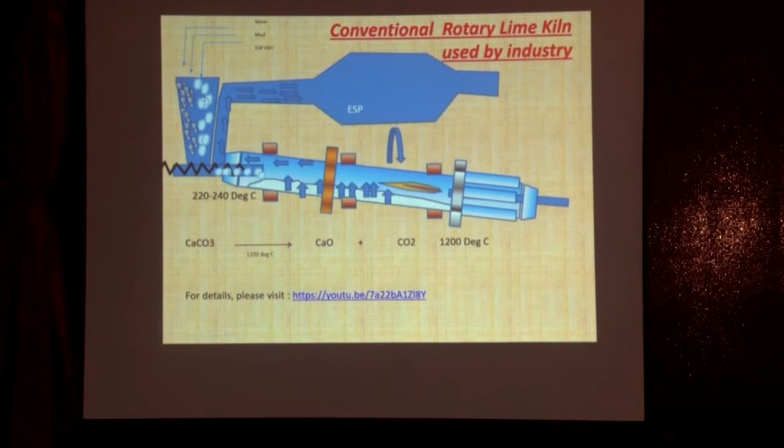This is the hopper where the mud filter scrap and limestone comes in, and it is fed through a conveyor at the feed end. The lime kiln's operation, if you see, is in 4 zones: the drying zone, heating zone, calcination zone, and then the cooling zone. So the product is finally removed from there. Here the burner firing is given by furnace oil or natural methane gas, and many fuels can be added to reduce fuel consumption. But definitely flame intensity has to be maintained. Usually the whole industry maintains this flame intensity by primary air and secondary air. So furnace oil is a must in the rotary lime kiln.

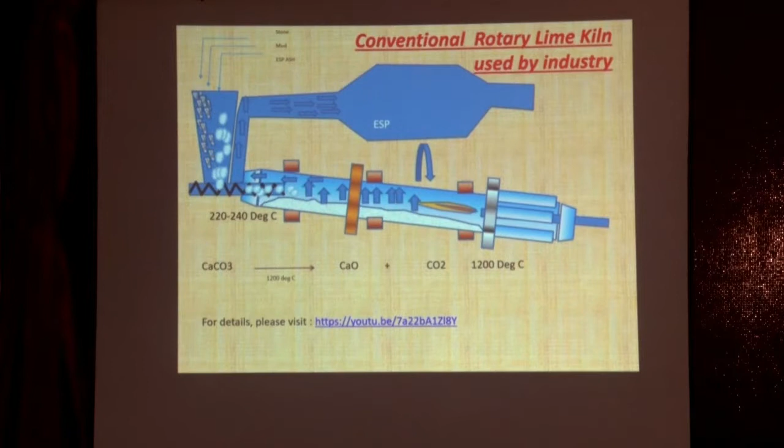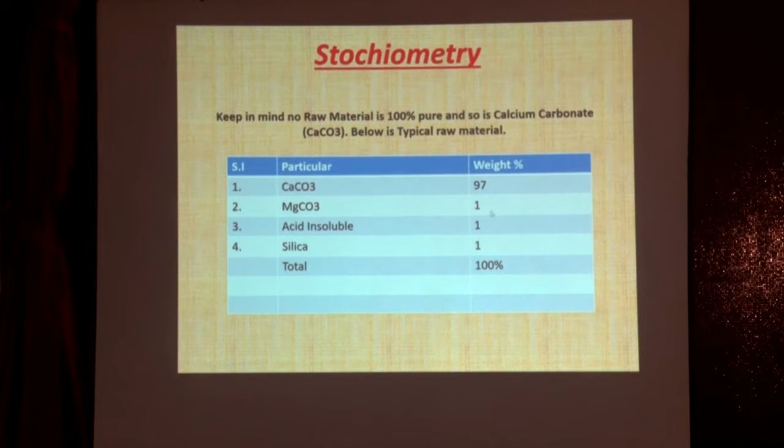This is typically the stoichiometry of the limestone. If you want very good quality calcium oxide, as Dixit ji has told, silica must be less, but this is the optimal. If you have a raw material mix with 1% silica, it is good enough, because the more pure the raw material, the more costly it is. We have to compromise and come to the point where it is optimal. This is the raw material mix we have checked. If you see, the calcium carbonate is 97% pure. The remaining is non-process material, or you can say inerts.

This is the reaction: if you have 100% pure calcium carbonate, the maximum purity is 100% and the maximum CO2 you can remove from it is 44 grams. But if your raw material is 97% pure, the maximum purity you can draw from it is 94.76, take it as 95. But 100% conversion is not recommended, because when you go for 100% conversion, there are chances that the silica in the system will bond with the calcium oxide and form calcium silicate, or it may even overburn. So there is a possibility of a maximum of 95% purity, but practically you can draw 90% purity from this raw material mix.

And the third one, usually if you see, normally people don't produce lime purity as high as 90. If you observe the data across the industry, they are stable at the purity of 80 to 85% purity. If you are producing 80.5% purity,

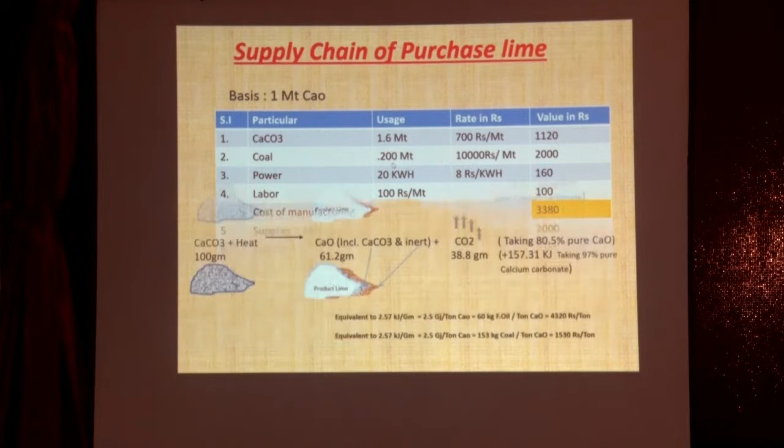Producing lime has two processes: one is slow and one is fast. Our rotary lime kiln process has fast cooking. Once they feed all the material, coal and limestone, they leave it for 3 days. Slowly it cooks. So coal requirement, not theoretical, practical coal requirement - I already told you coal requirement is 153,

but practically energy requirement is 4.22, 4.5 gigajoule per ton of CaO. So 0.2 metric ton coal is required. This is the value. Power consumption, labor hours in terms of rupees.

If you see the costing of lime produced nowadays, it is 3,380 rupees. So the supplier also gives this lime at the cost of some profit. So the sale price of the lime becomes this much. At this price, usually the seller says, take this lime and you have to bear the GST and you have to bear the logistic cost also.

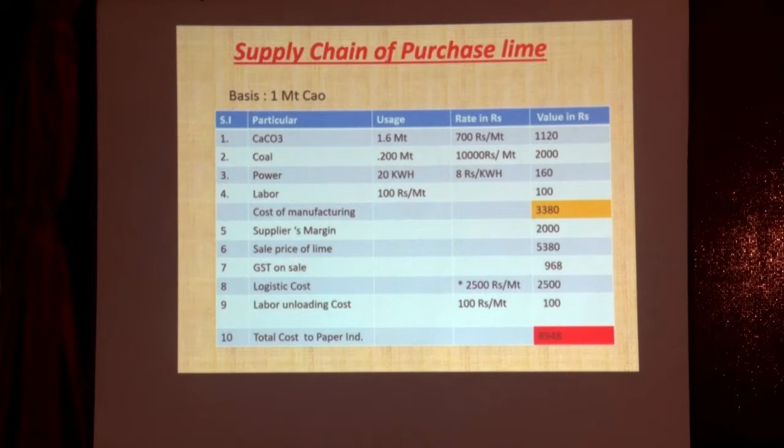So our caution and our discussion with you all is, because all of you are technocrats and knowledgeable people, as Mr. M.K. Gupta ji also told, there is no dearth of knowledge in India. So this value can be saved, and this value per ton of paper contributes a lot. If they can produce it, we can also produce it. But we have changed the way we are doing it.

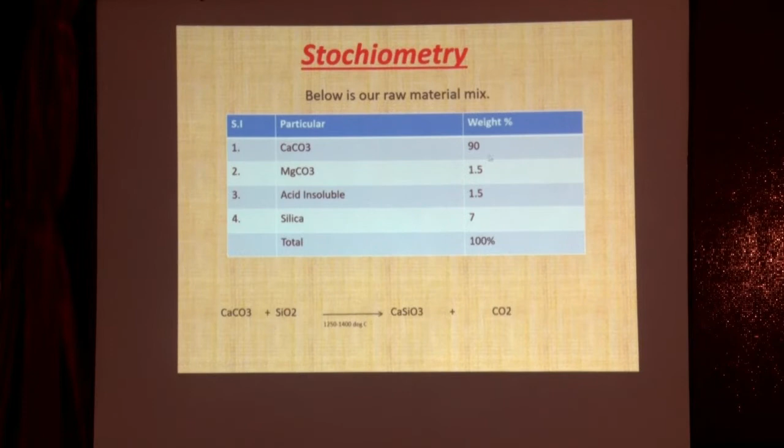So only 10% is filled with calcium carbonate and CO. Out of the total circumference, only 10% is filled. There is poor contact with flue gas and CO. So there is also a poor heat transfer coefficient, because most of the heat is getting lost through the surface area of the rotary lime kiln, as well as in the flue gases to dry the lime bed. Because on average, people have dryness of 60%.

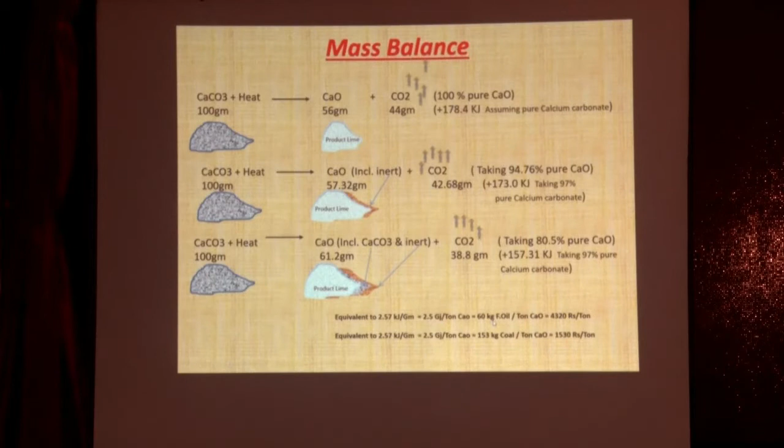Those are very good ones, those have very low silica. They are achieving dryness up to 75%, even 80%. They have optimized their fuel consumption up to 160 kg per ton of CaO. Even if you calculate, this fuel consumption is still high, because our theoretical energy requirement is only 60 kg at 80% purity, and they are consuming 160 kg. If I take 75% efficiency of the rotary lime kiln, it should not be more than 80 to 90 kg. So there is still a lot of scope.

This is the usage of lime produced in the rotary lime kiln. Typically the data may vary slightly. The usual limestone makeup is 0.15, that is 150 kg per ton of CaO, and furnace oil is 120 kg. Some mills have achieved slightly lower consumption but with the addition of other fuels.

So ultimately, if you reduce this makeup cost, because some mills are adding purchased lime also as a makeup, the overall costing becomes very, very high in the rotary lime kiln.

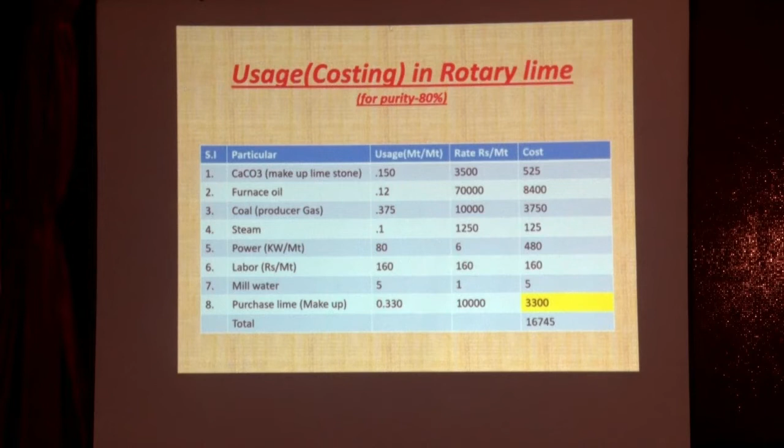And if you discuss with your colleagues or other people, they will say rotary lime kilns usually don't have payback. But the time has come when we cannot simply put the cost of the rotary lime kiln into another pool. We have to think wisely about how we can work on it.

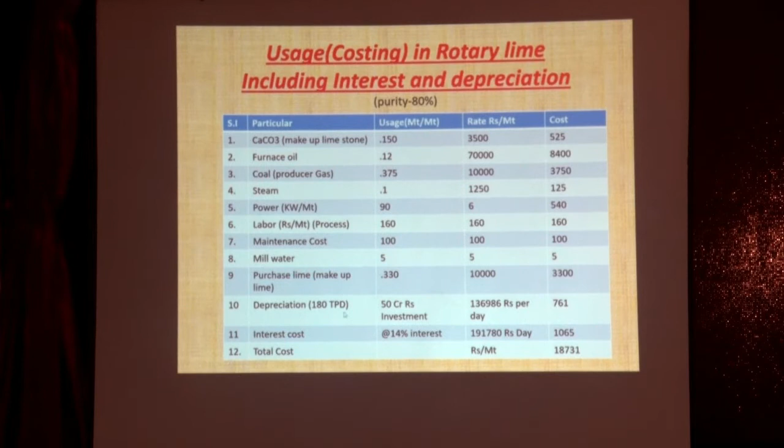We can see lime mud as a waste, but it can be wealth. A rotary lime kiln also has depreciation which can never be fully covered, and every investment we make has some interest cost also.

This is the efficiency of the rotary lime kiln. Per ton, the typical fuel consumption in the rotary lime kiln is 4.2 to 4.5 gigajoules per ton of CaO. And the theoretical fuel consumption, as I already mentioned, at 80% purity, is only 2.5 gigajoules per ton of CaO. So what is the efficiency of the rotary lime kiln? You can calculate it.

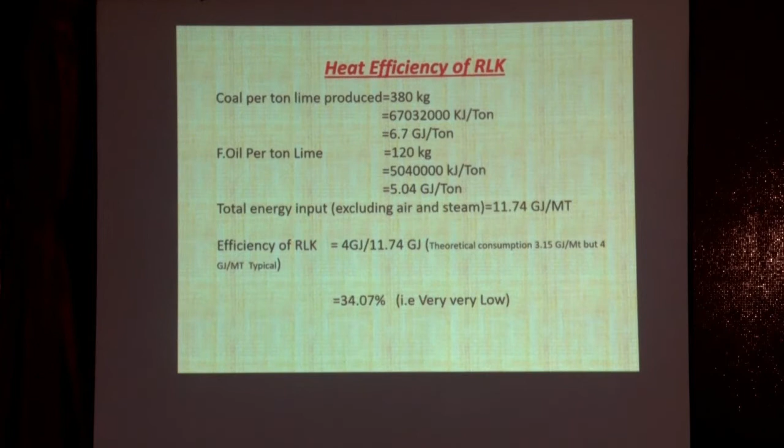I have taken 4 gigajoules consumed as 100%, though it is not the theoretical value. So this lime kiln is running at a low efficiency of 34%, meaning out of 100 we are getting only 34% marks - just the passing marks.

Why is this happening? There are huge radiation losses from the rotary lime kiln surface, which can be as high as 5,000 to 6,000 watts per meter square of surface area. There are also losses through the flue gas, which can be as high as 3.8 gigajoules per metric ton - actually more than the theoretical fuel requirement.

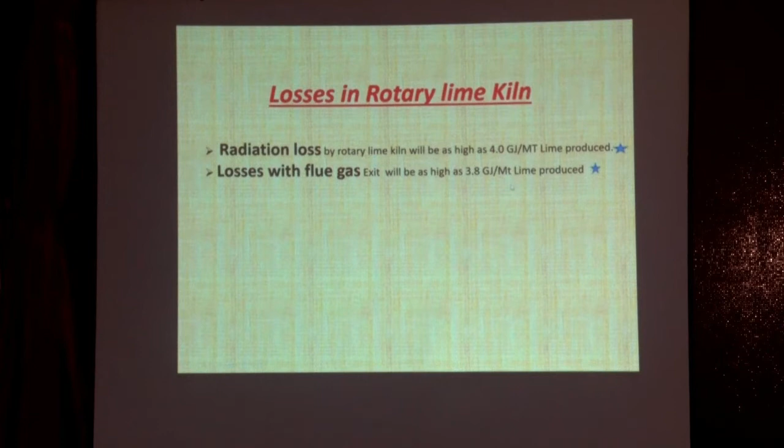This is where the state-of-art vertical lime kiln comes in. We thought about why agro-based paper mills cannot run their lime kiln, why they are so reluctant to run it, and why CPCB is putting pressure on them, because they cannot throw this lime outside the mill due to its high silica content. They are unable to run the rotary lime kiln because their silica content is as high as 5% to 8%.

For this experiment, we took the mud from one agro-based paper mill - we cannot disclose the name of the mill - whose silica content was 8%. By a one-stage centrifuge system, we reduced the silica content to 3.5% in a single stage, and our aim is to reduce the silica content further to 1.5%.

We know from a lot of discussion and research that the density of calcium carbonate particles and the density of silica are very close. But silica particles are somewhat larger in size than calcium carbonate particles, and we have been successful in reducing the silica content up to 3.5%.

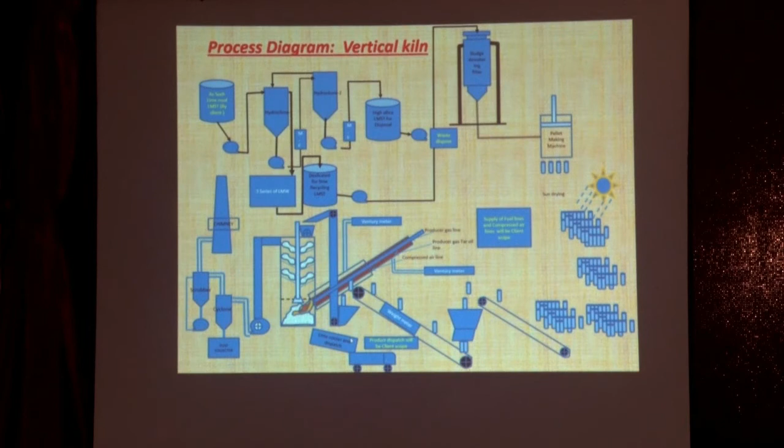So these are the pellets. Pellets are dried in the open sun area for 30 days. They automatically achieve dryness as high as 85% to 90%. Now these pellets are fed into the vertical lime kiln. They go from baffle to baffle. Finally, it is controlled here in the heat. There is a disc below this which continuously rotates at 1 to 5 RPM, and by flame we are burning these pellets. By providing a gate, we can take out the lime. This lime can be transported anywhere, crushed and reused.

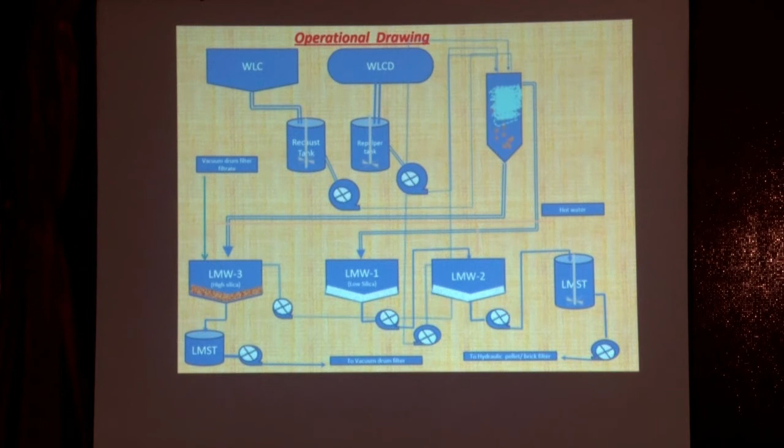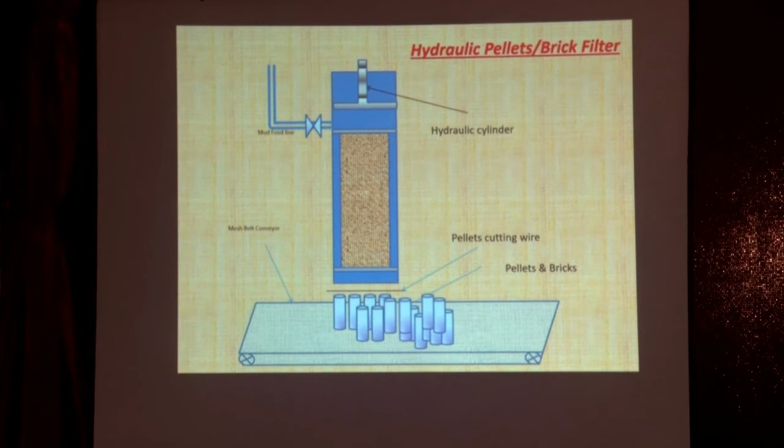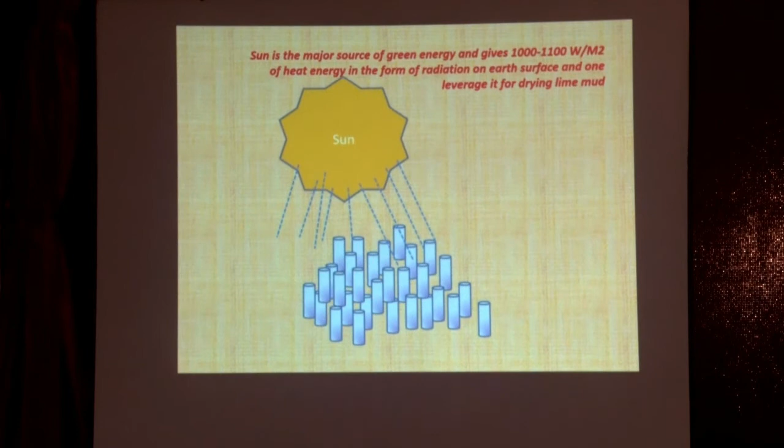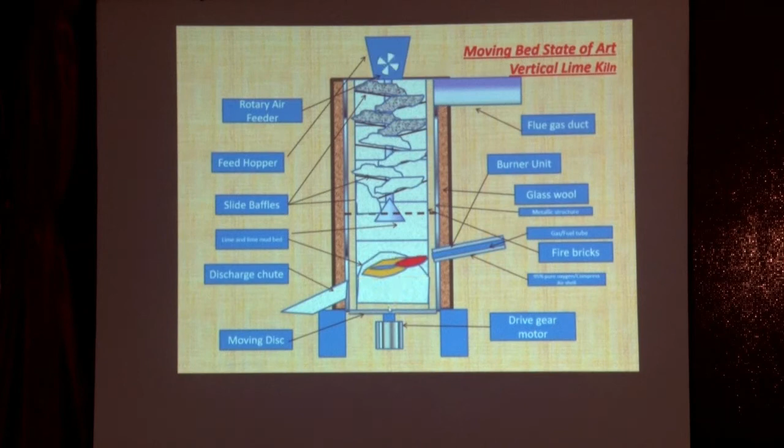This is a system sketch for your understanding. This is the hydraulic pellet machine sketch. I will show you the actual machine also. These are the actual pellets. At the bottom is the disc which is continuously rotating. We have integrated this with the rotary lime kiln also. You can integrate with it.

So you need not bother about the feed end temperature. If it is increasing above 240, you do not need to bother, because in the earlier case, if temperature increased above 240 degrees, it was a big concern, because the gases go directly to the ESP, and higher temperature gases are not acceptable in the ESP. It should be between 140 and a maximum of 220.

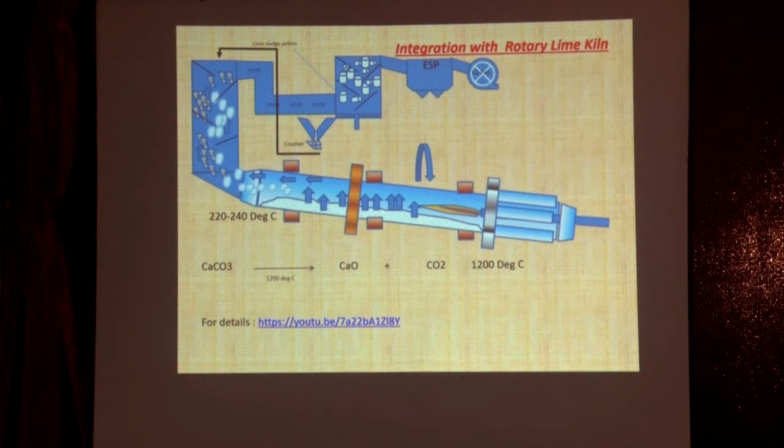Eh? Well, it is complete, sir. Almost complete.

So, if the lime fed to the rotary lime kiln has 4.5% silica, which means almost 8.5% silica in the product, it gets associated with calcium oxide to form calcium silicate. So, if you want high purity lime, you must have as little silica as possible. 1% is the optimum. If you bring it to 1% silica anyhow, it is best.

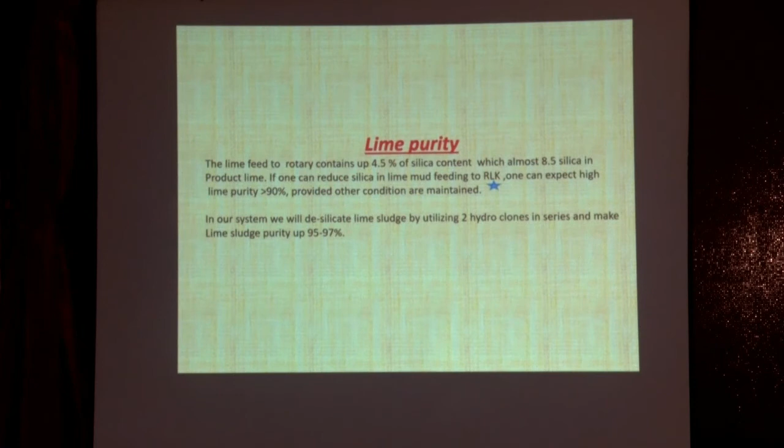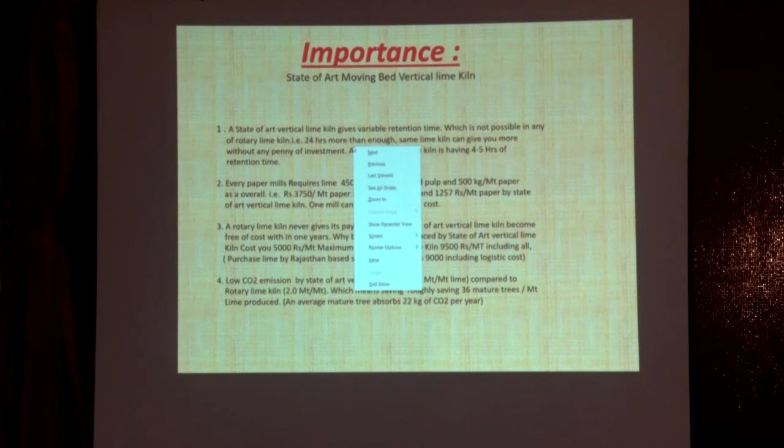If you operate the lime kiln at higher efficiency, you are producing less CO2. You are working toward the goal of lesser emissions and climate change. This is why all the presentation and the new concept. It is not installed yet, but we are in talks with a number of mills about why not to come forward in this direction. And this can be a thought of importance. This is all.